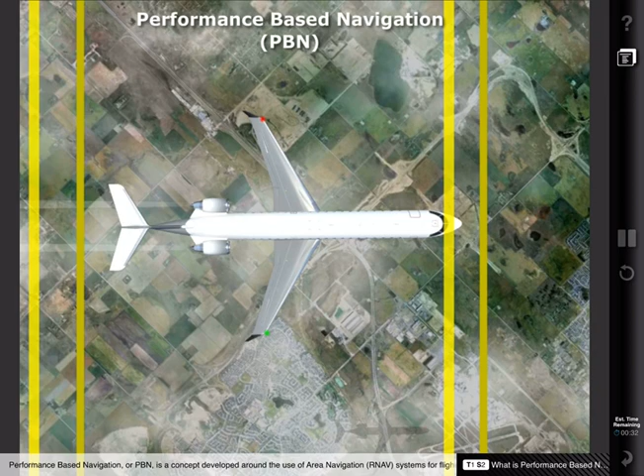Performance-based navigation, or PBN, is a concept developed around the use of area navigation, or RNAV, systems for flight operations. It recognizes and utilizes emerging technologies and improved aircraft navigation capabilities.

PBN provides a modern basis for airspace and obstacle clearance design, replacing conventional sensor-based navigation. This includes updated design for oceanic remote, en route, terminal, and approach phases of flight.

Conventional sensor-based navigation relies on aircraft reception of signals from ground-based radio navigation aids, such as NDB, VOR, localizer, or DME. In sensor-based navigation, the ground-based signals are used directly to navigate to and from navigation aids.

Sensor-based navigation has several drawbacks, including that airspace and obstacle clearance design criteria are variable and depend on the characteristics of each ground-based nav aid type.

Navigation system error increases as the aircraft increases its distance from the nav aid. And routes and approach tracks are restricted to straight-line designs and are constrained by large obstacle clearance allowances and the physical siting of the navigation aid or aids.

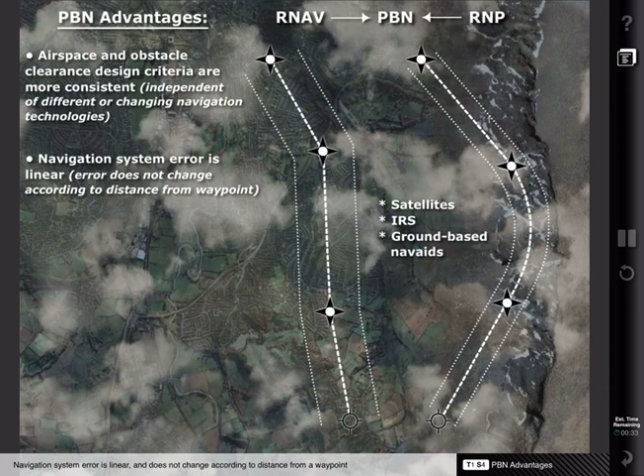Navigation system error is linear and does not change according to distance from a waypoint. Routes and approach tracks can include turning designs and are less constrained by obstacles due to smaller clearance allowances.

Navigation route design no longer needs to consider nav aid siting issues. And finally, the navigation function is performed by highly accurate and sophisticated onboard equipment, allowing a reduction in cockpit workload and an increase in safety.

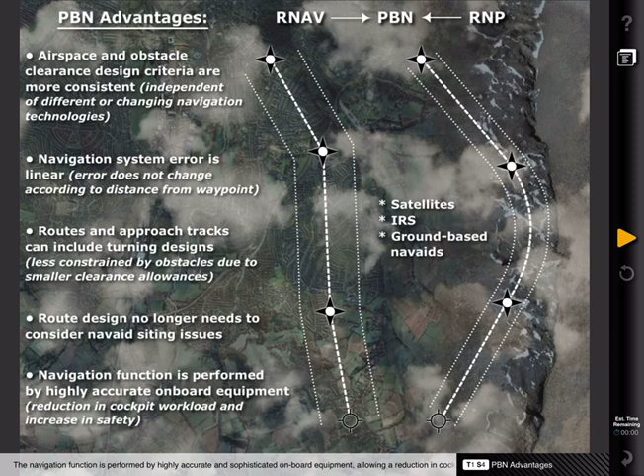The PBN concept relies on the use of an RNAV system. Two core inputs are required for the application of PBN: the NavAid infrastructure and the navigation specification. Applying these components in the context of routes and instrument procedures results in a third component: the navigation application. This topic will discuss the role of each of these components in the concept of PBN.

The concept of NavAid infrastructure refers to ground or space-based navigation aids. Ground-based navigation aids include NDB, VOR, and DME. Space-based nav aids include GNSS elements. As mentioned previously, PBN uses the two types of nav aids together for position fixing and navigation.

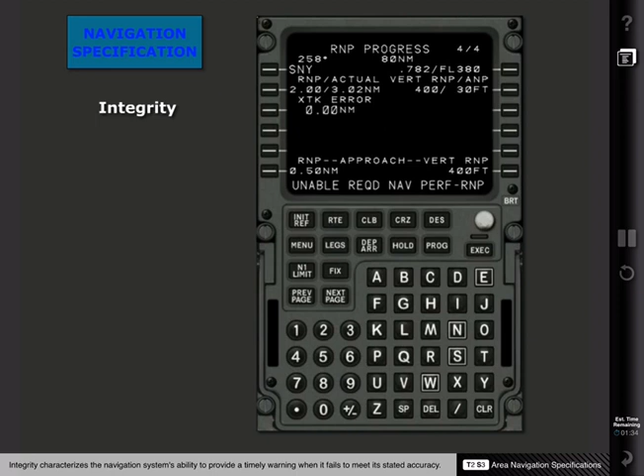Additionally, the RNAV system must have a level of integrity required by the given navigation specification in which the aircraft is operating. Integrity characterizes the navigation system's ability to provide a timely warning when it fails to meet its stated accuracy.

The safety of the operation is also contingent upon the accuracy, resolution, and integrity of the data being used. The processes applied during data origination will ensure the accuracy of the data.

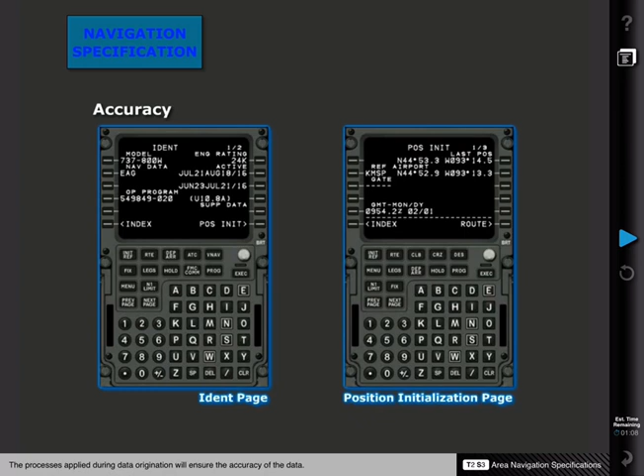A navigation specification that includes a requirement for onboard navigation performance monitoring and alerting is referred to as an RNP, or Required Navigation Performance Specification. A navigation specification that does not include a requirement for onboard navigation performance monitoring and alerting is referred to as an RNAV, or Area Navigation Specification.

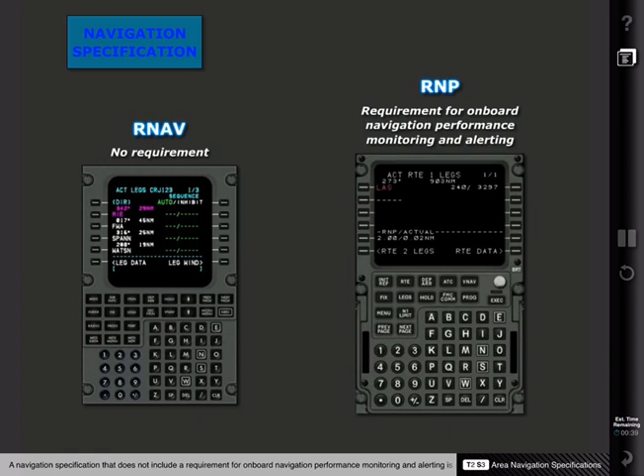For any particular PBN operation, it is possible that a sequence of RNAV and RNP applications is used. Be aware that compliance with one specification does not automatically imply compliance with another. More importantly, being compliant with a more stringent specification does not automatically imply compliance with a less stringent specification. Each RNAV and RNP specification will be discussed in detail later in the lesson.

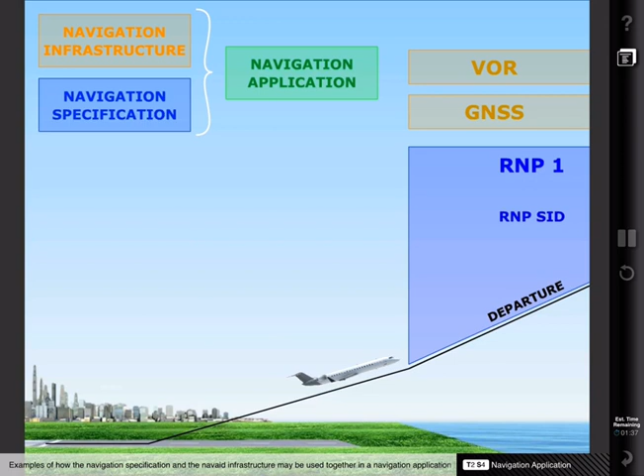The navigation application refers to utilizing the appropriate infrastructure and the specification required for the operation. Examples of how the navigation specification and the NavAid infrastructure may be used together in a navigation application include RNAV or RNP SIDs and STARs, RNAV or RNP ATS routes, and RNP approach procedures.

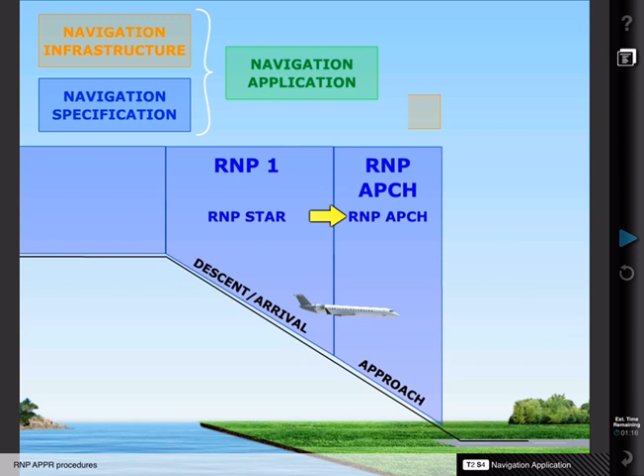RNAV systems range from single sensor-based systems to systems with multiple types of navigation sensors. The RNAV system typically integrates information from sensors such as air data, inertial reference, radio navigation, and satellite navigation, together with inputs from internal databases as well as crew-entered information.

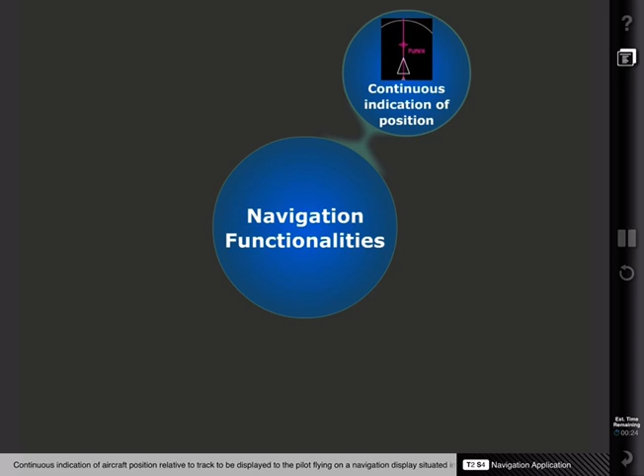Both RNAV and RNP specifications include requirements for certain navigation functionalities. At a basic level, these functionalities include continuous indication of aircraft position relative to track, displayed to the pilot flying on a navigation display situated in his or her primary field of view, display of distance and bearing to the active waypoint, display of ground speed or time to the active waypoint, navigation data storage function, and appropriate failure indication of the RNAV system, including the sensors.

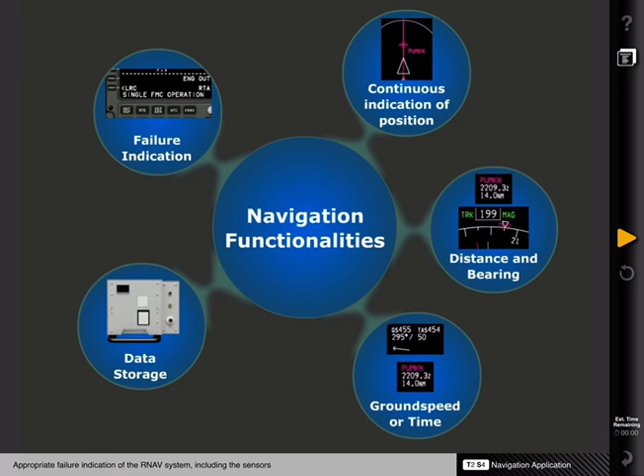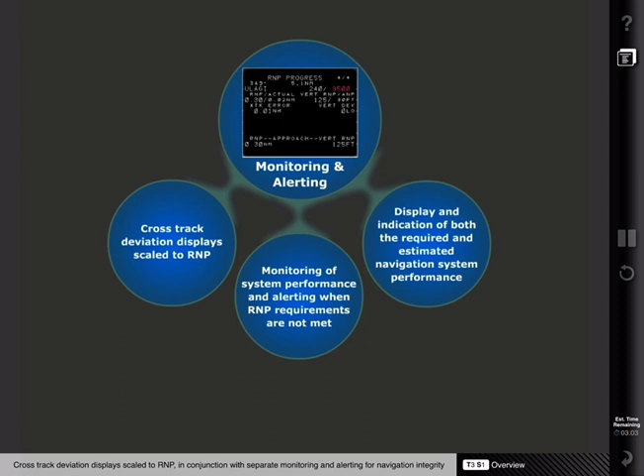An RNP system is an RNAV system whose functionalities support onboard performance monitoring and alerting. The performance monitoring and alerting capabilities may be provided in different forms depending on the system being used, including display and indication of both the required and estimated navigation system performance, monitoring of the system performance and alerting of the crew when RNP requirements are not met, and cross-track deviation displays scaled to RNP in conjunction with separate monitoring and alerting for navigation integrity.

The airworthiness approval process assures that each item of the required area navigation equipment installed is of a type and design appropriate to the operation. Additionally, operators need to ensure the required installations will function properly under foreseeable operating conditions.

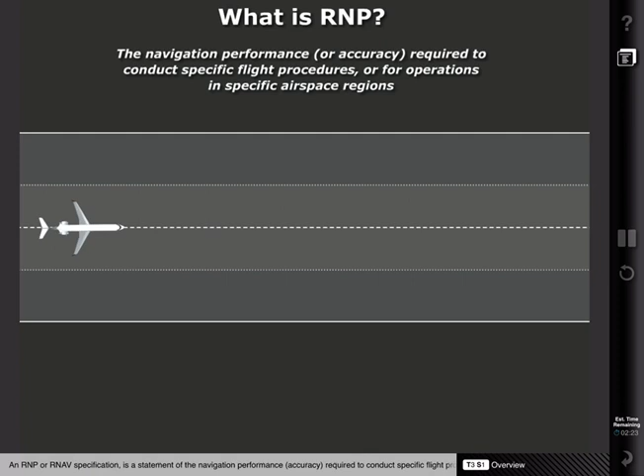An RNP or RNAV specification is a statement of the navigation performance or accuracy required to conduct specific flight procedures or for operations in specific airspace regions. In oceanic remote, en route, and terminal phases of flight, PBN is limited to operations with lateral performance requirements and time constraints. During the approach phase of flight, PBN accommodates both lateral and vertical operations.

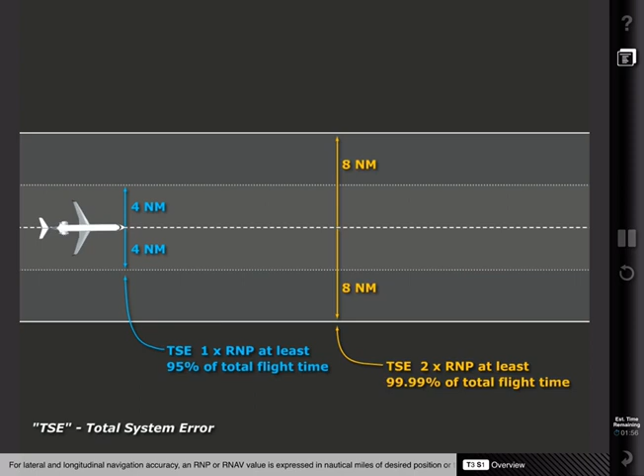For lateral and longitudinal navigation accuracy, an RNP or RNAV value is expressed in nautical miles of desired position or track. Actual navigation performance, or ANP, is a measure by the FMC of its position accuracy.

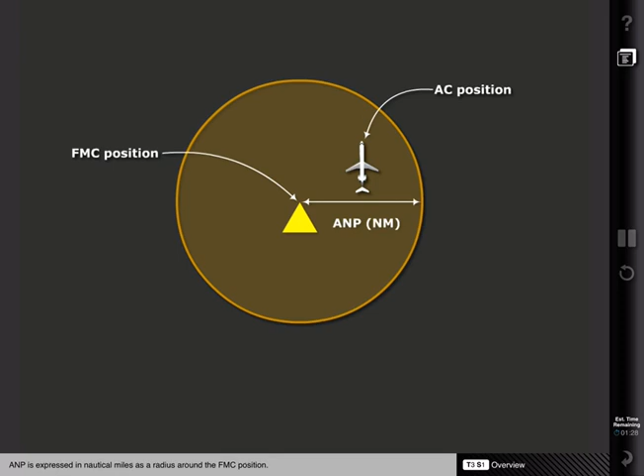ANP is expressed in nautical miles as a radius around the FMC position. The FMC estimates that there is a 95% certainty of the aircraft's actual position being within the ANP distance of the FMC position. A smaller ANP indicates a more accurate aircraft position relative to FMC position. A larger ANP indicates a possibly less accurate aircraft position relative to FMC position.

ANP is normally a low value, but may increase if degradation of satellite or ground-based signals occurs, or if equipment failures occur on board.

The area navigation system must be sufficiently accurate to ensure that the ANP is maintained within the RNP or RNAV distance of the desired route or procedure 95% of the time.

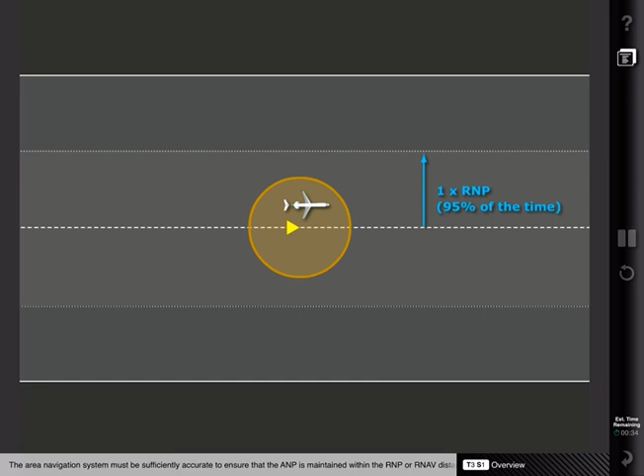To account for the small percentage of time when the aircraft position may be outside the RNP distance, a containment limit distance of 2 times the RNP value is expressed for airspace separation and obstacle clearance.

The RNAV system must be sufficiently accurate to ensure that the aircraft's actual position is maintained within the containment limit distance of the FMC calculated position 99.999% of the time.

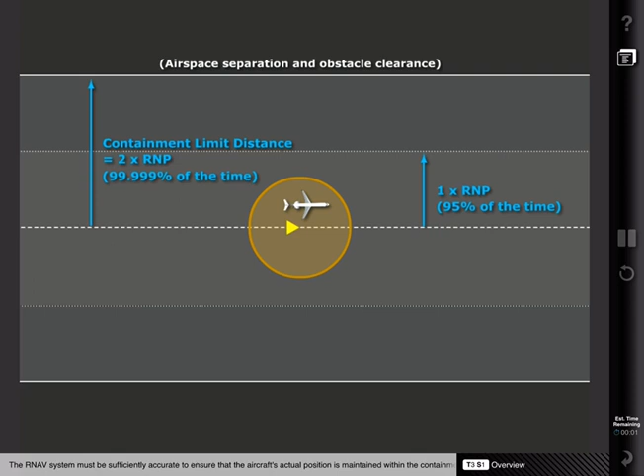The inability to achieve the required lateral navigation accuracy may be due to navigation errors related to aircraft tracking and positioning. The three main errors in the context of onboard performance monitoring and alerting are Path Definition Error, or PDE, Flight Technical Error, or FTE, and Navigation System Error, or NSE.

PDE is the difference between the defined path and the desired path. In most cases, PDE is considered negligible, since the named routes and procedures retrieved from the navigation database are consistent, repeatable paths.

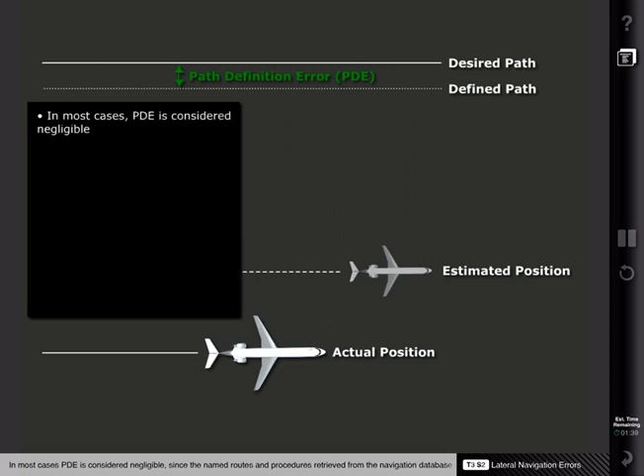A consistent, repeatable path cannot be defined for a turn that allows for a flyby turn at a waypoint, a flyover waypoint, or occurs when the aircraft reaches a target altitude. For these, a variability of route will be expected. Onboard performance monitoring and alerting of PDE are managed by gross reasonableness checks of navigation data.

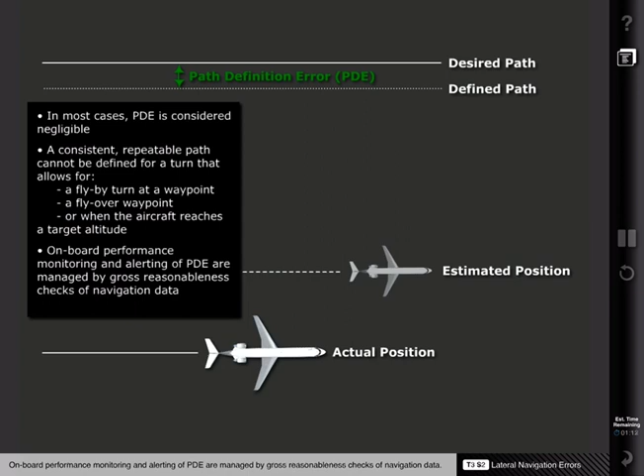FTE refers to the pilot or autopilot's ability to follow the defined path or track. FTE can be monitored by the autopilot or with crew procedures, for example, with a moving map display.

NSE is defined as the difference between the aircraft's estimated position and actual position.

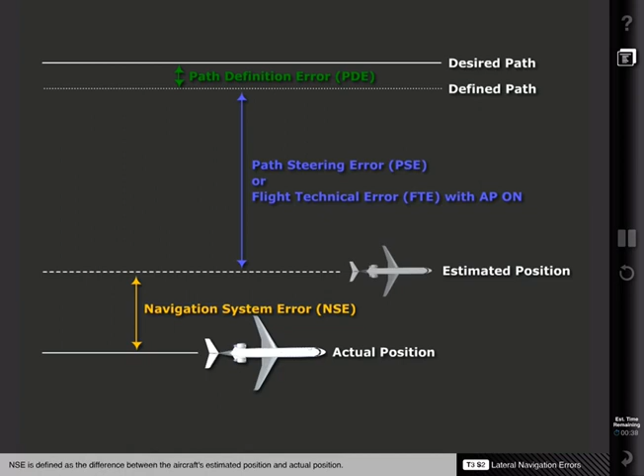Total system error, or TSE, is the total of the errors combined mathematically, not simply added together. The TSE must remain equal to or less than the required accuracy for 95% of the total flight time.

Abnormal and contingency procedures are to be used in case of loss of the PBN capability. These procedures will depend on the RNAV system installed and the specification of operation.

PBN is based on the ability to assure reliable, repeatable, and predictable flight paths for improved capacity and efficiency. This requires not only the functions traditionally provided by the RNAV system, but may also require specific functions to improve procedures and airspace and air traffic operations.

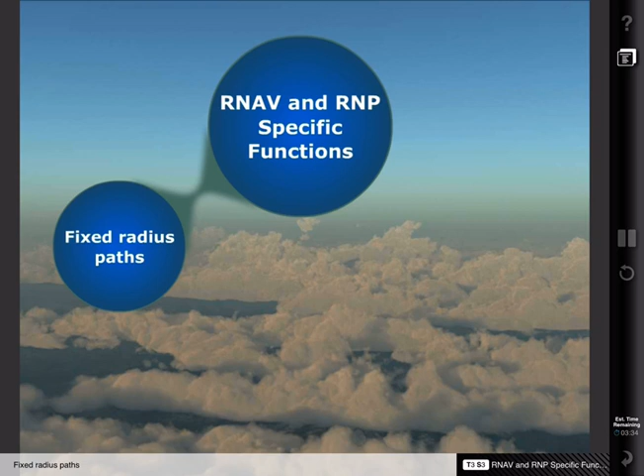Some of the specific capabilities we will discuss include fixed radius paths, RNAV or RNP holding, and lateral offsets.

The fixed radius path, or FRP, can be one of two types: radius to fix, or RF leg type, or fixed radius turn, or FRT. The RF leg should be used when there is a requirement for a specific curved path radius in a terminal or approach procedure. The RF leg is defined by a radius, arc length, and fix. RNP systems supporting this type of turn provide the same ability to conform to the track-keeping accuracy in the turn as in the straight line.

The FRT is intended to be used with en route procedures. Due to how the procedure data is defined, the RNP system creates the fixed radius turn. There are two possible radii associated with this type of turn: 22.5 nautical miles for high altitudes above flight level 195, and 15 nautical miles for low altitudes. This enables improvement in airspace usage through closely spaced parallel routes.

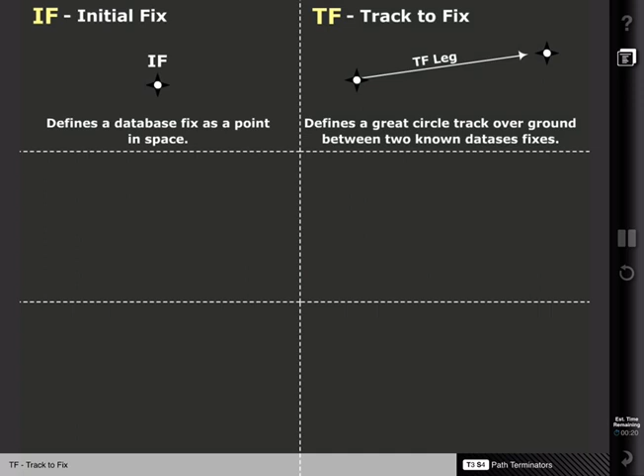Path terminators are a set of specific codes that define a type of termination from a path. Path terminators are assigned to all SIDs, STARs, and approach procedures and include, but aren't limited to, IF, or initial fix, TF, or track to fix, CF, course to fix, DF, direct to fix, FA, fix to an altitude, and CA, course to an altitude.

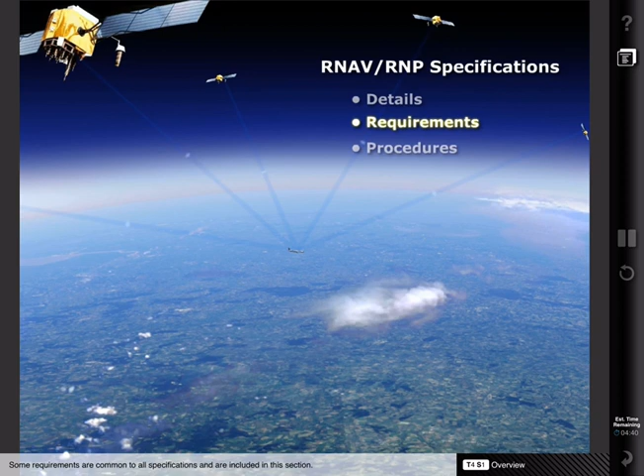We will now discuss the details, requirements, and procedures for each RNAV and RNP specification. Some requirements are common to all specifications and are included in this section. Commercial operators must have a training program addressing operational practices, normal and contingency procedures, and specific items related to the specification.

In order for operators to get approval for RNAV/RNP operations, they must prove their aircraft are properly equipped with the appropriate navigation system. Additionally, some specifications define the instrument display requirements, such as being visible to the pilot in their primary field of view and the navigation map having lateral deviation functionality.

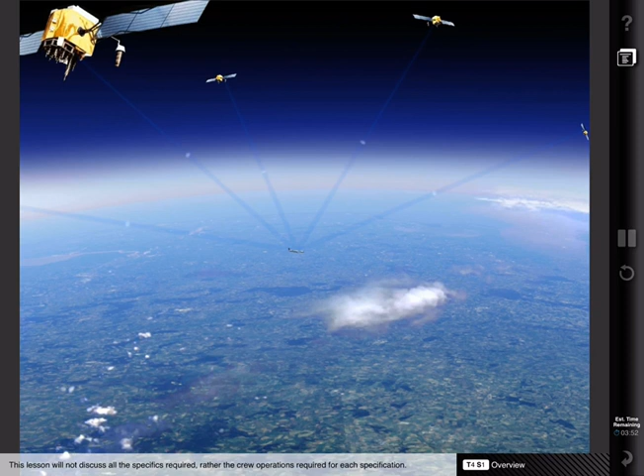This lesson will not discuss all the specifics required, rather the crew operations required for each specification.

Operators and pilots intending to conduct operations in RNAV or RNP airspace need to use the appropriate ICAO flight plan designation. For RNAV, this means filing with the appropriate flight plan suffix indicating approval for operation on the route. For RNP operation, the letter R should be placed in Block 10 of the ICAO flight plan to indicate the pilot has reviewed the planned route of flight and determined the RNP requirements and the aircraft and operator approval. The accuracy capability should be placed in the remarks section.

Pilots must review aircraft maintenance logs to ensure proper operation of equipment required for the RNAV or RNP accuracy. If an MEL is utilized, ensure the inoperative equipment allows for RNAV or RNP dispatch.

Additionally, pilots need to ensure onboard navigation data is current and includes the appropriate procedures required of the operation. The database must be valid for the current Aeronautical Information Regulation and Control Cycle, unless otherwise specified in Operations Documents or AMC.

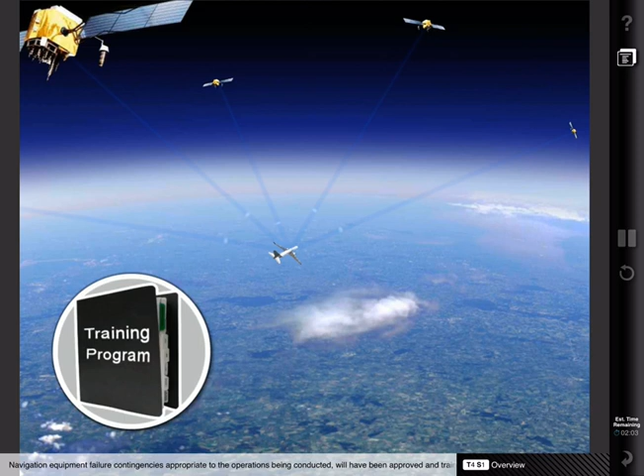For any operation utilizing GNSS, operators are required to ensure appropriate RAIM is available for the operation. Navigation equipment failure contingencies appropriate to the operations being conducted will have been approved and trained in the pilot's training program. Should any failure occur, the pilot should revert to this training as appropriate.

Additionally, the pilot must notify ATC of any loss of RNP RNAV capability and their intentions.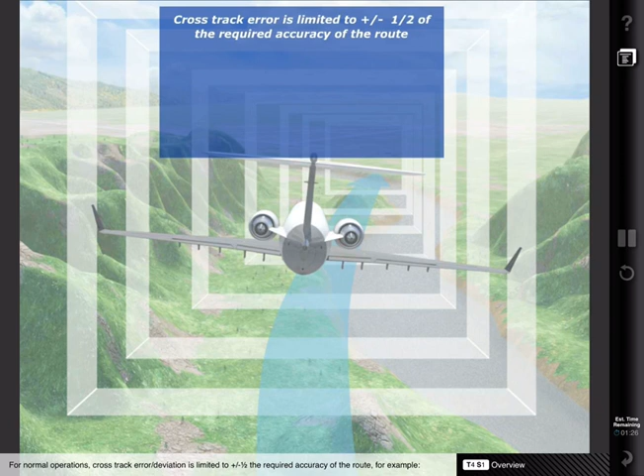All pilots are expected to maintain route centerlines during all RNAV operations, unless authorized by ATC or in an emergency. For normal operations, cross-track error deviation is limited to plus or minus half the required accuracy of the route.

For example, 0.5 nautical mile for RNAV1, 0.5 nautical mile for RNP1, 1 nautical mile for RNAV2, 2 nautical miles for RNP4. Brief deviations from this are allowable during and immediately after procedure or route turns. The deviation must not exceed 1 times the navigation accuracy, 1.0 nautical miles for RNAV1, 2.0 nautical miles for RNAV2, and so on.

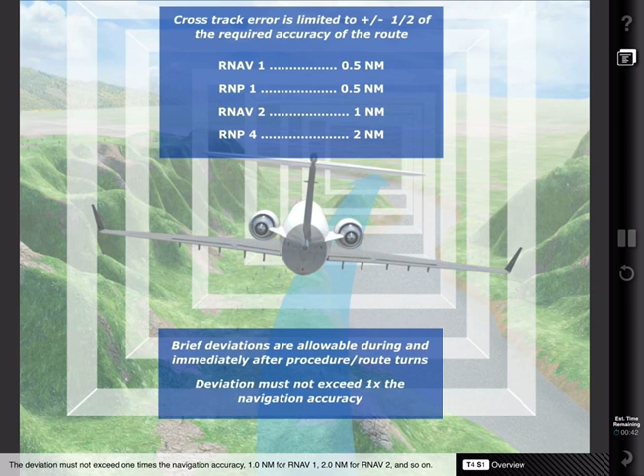RNP values may be changed automatically by the FMC to certain default values, or may be set manually by the crew when required by procedures. Typical RNP settings for flight operations are: Oceanic airspace, RNP 10 or 4. Continental en route, RNP 2. Terminal airspace, RNP 1. Approach and departure, RNP 1. RNP approaches, RNP .1 to .3.

RNAV-10 has been designated for operations in oceanic and remote areas. Though the designation of the airworthiness and operational approval, as well as airspace and route designation, is RNP-10, it will be referred to as RNAV-10. This is to keep consistency with the differentiation of RNP requiring monitoring and alerting, and RNAV not having this requirement.

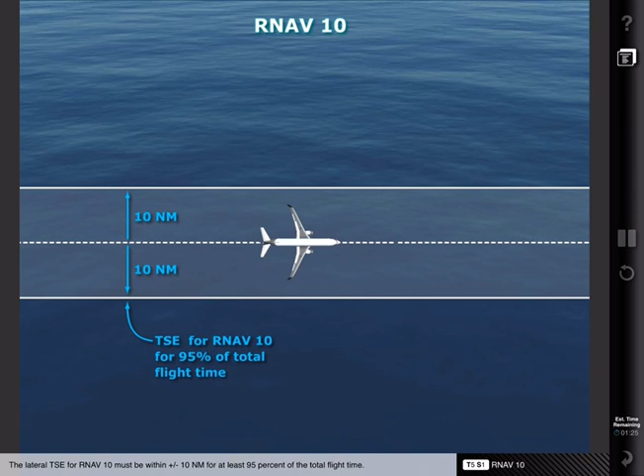The lateral TSE for RNAV-10 must be within plus or minus 10 nautical miles for at least 95% of the total flight time. The along track error must also be within plus or minus 10 nautical miles for at least 95% of the total flight time. Additionally, RNAV-10 supports 50 nautical mile lateral and 50 nautical mile longitudinal distance-based separation minima.

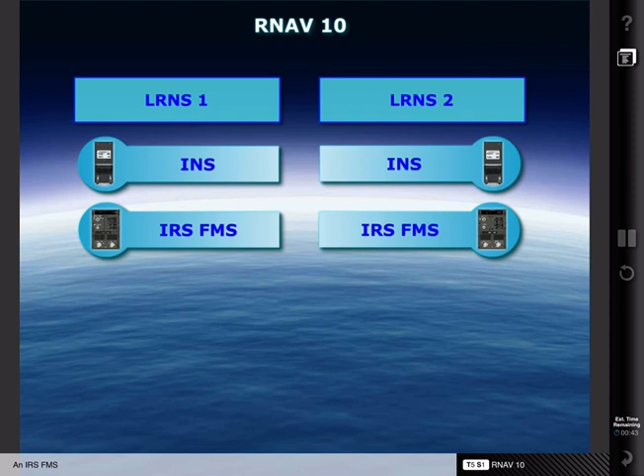RNAV-10 requires that the aircraft operating in oceanic and remote areas be equipped with at least 2 independent and serviceable long-range navigation systems, or LRNSs, comprising an INS, an IRS-FMS, or a GNSS.

For aircraft utilizing dual INS or dual IRU systems, RNAV-10 operations have a time limit of 6.2 hours of flight time. The timing starts when the systems are placed in navigation mode or at the last point at which the systems are updated.

Aircraft equipped with a single INS or IRU and GNSS do not have these time limitations.

Prior to entering oceanic airspace, the position of the aircraft must be checked as accurately as possible by using external nav aids. This may require DME and/or VOR checks to determine navigation system errors through displayed and actual positions.

Cross-checking procedures must be used in flight to identify navigation errors in sufficient time to prevent aircraft deviation from cleared routes. Any deterioration or failure of the navigation equipment below that required, or deviation due to a contingency procedure, must be reported to ATC.

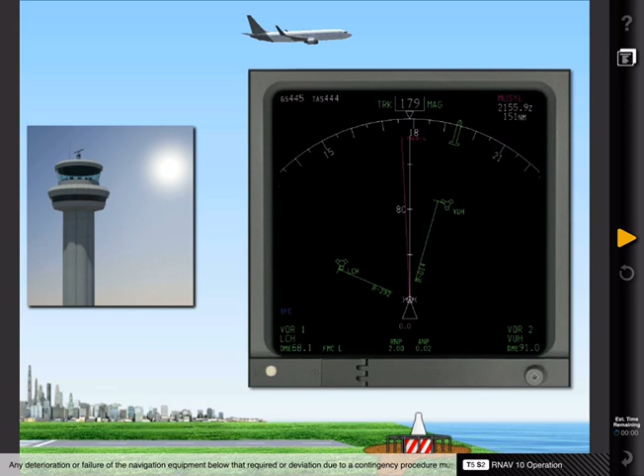RNAV 5 operations are typically conducted en route and on arrivals. During operations in RNAV 5 airspace or routes, the lateral TSE must be within 5 nautical miles for at least 95% of the total flight time.

RNAV 5 operations are based on the use of RNAV equipment that utilize inputs from one or more of the following to determine the aircraft position along with a means to establish and follow the desired path: VOR DME, DME, INS or IRS, and GNSS.

RNAV 5 requires no regulation to carry a navigation database, and therefore is subject to the limitations associated with manual insertion of waypoint coordinates. Additionally, since the specification does not require the aircraft to be installed with dual RNAV systems, an alternate navigation source must be operable in the event of loss of RNAV capability.

Generally, RNAV 2 is used en route, while RNAV 1 is used for terminal phases of flight, including arrivals and departures. During RNAV 1 operations, the lateral TSE must be within plus or minus 1 nautical mile for at least 95% of the total flight time.

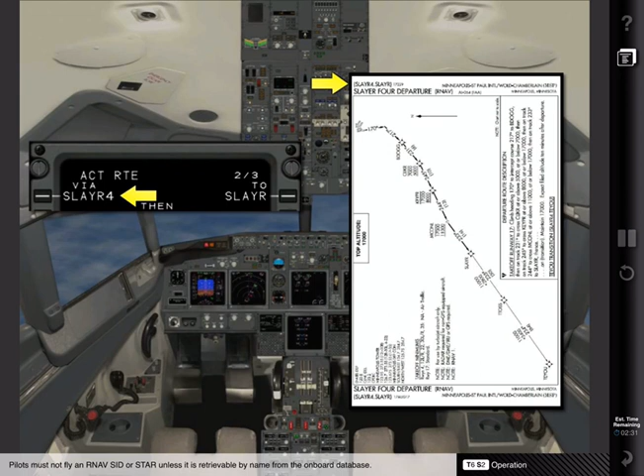Pilots must not fly an RNAV SID or STAR unless it is retrievable by name from the onboard database. The pilot should confirm the routing conforms to that of the charted route. Once loaded by name, the SID or STAR may be subsequently modified by the entry or deletion of specific waypoints in response to ATC clearances. The manual entry or creation of new waypoints by latitude and longitude values is not permitted.

Additionally, pilots may not change any RNAV SID or STAR database waypoint from a flyover to a flyby and vice versa.

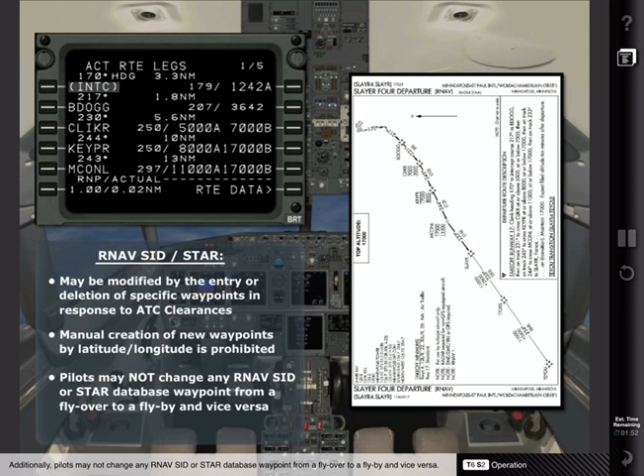Although not recommended, routes can be built using named fixes waypoints from the database, as long as all fixes along the published route to be flown are inserted. The route may be subsequently modified by the insertion and deletion of named waypoints in response to ATC clearances. As with SIDs and STARs, the creation of waypoints by manual entry of latitude and longitude values is prohibited.

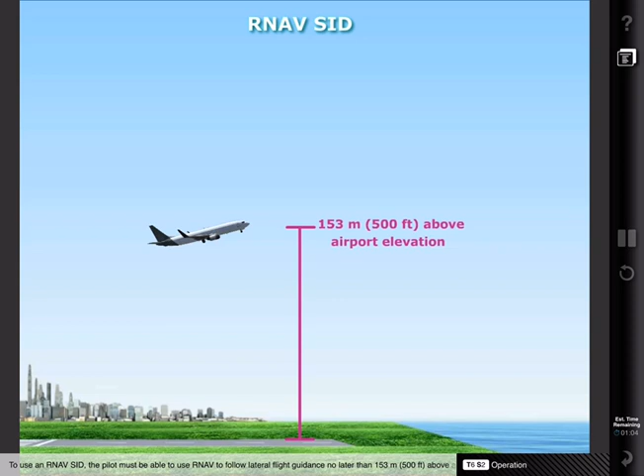To use an RNAV SID, the pilot must be able to use RNAV to follow lateral flight guidance no later than 153 meters or 500 feet above airport elevation, though published RNAV guidance on a given route may begin higher.

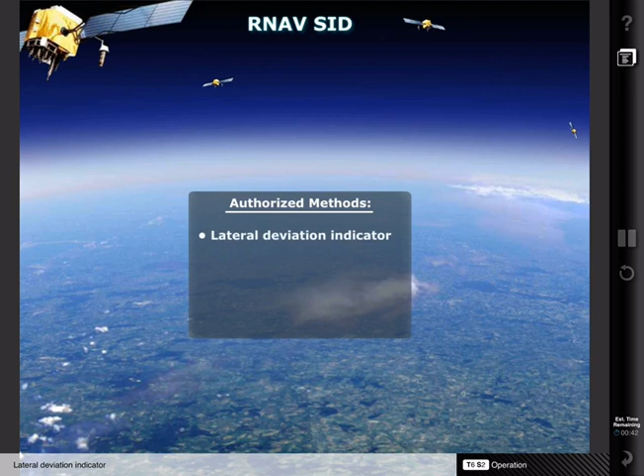For aircraft using GNSS, the signal must be acquired before the takeoff roll commences. Pilots must use an authorized method to achieve an appropriate level of performance for RNAV-1, which includes lateral deviation indicator, navigation map display, flight director, and/or autopilot.

Route modifications in the terminal area may take the form of radar headings and direct-to clearances, which must be complied with. Insertion of waypoints loaded by name from the database may be required and is acceptable. To reiterate, manual entry or modification of the route using waypoints not in the database is not permitted.

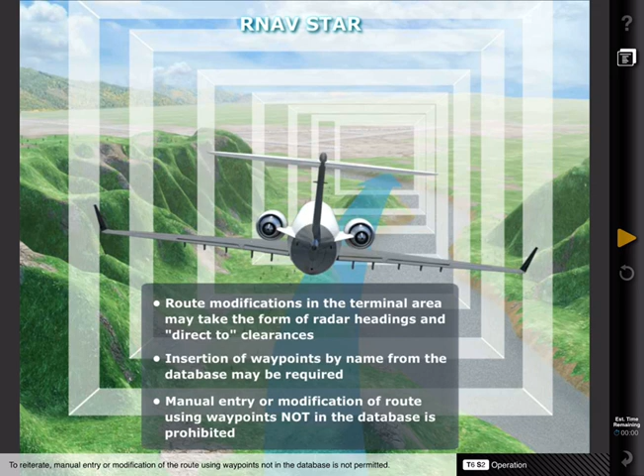We will now discuss RNP specification details. RNP-4 is designed for operations in oceanic and remote airspace, therefore has no requirement for ground-based nav aids.

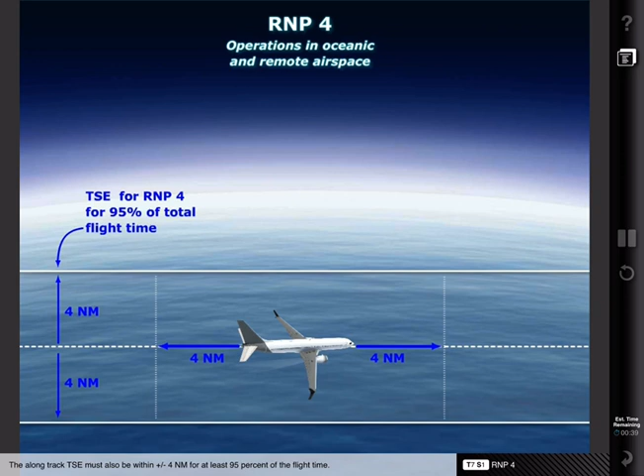During RNP-4 operations, the lateral TSE must be within plus or minus 4 nautical miles for at least 95% of the flight time. The along-track TSE must also be within plus or minus 4 nautical miles for at least 95% of the flight time. The flight technical error should not exceed 2.0 nautical miles to satisfy the 95% accuracy requirement.

GNSS is the primary means of navigation for RNP-4, either as a standalone navigation system or as part of a multi-sensor system. For RNP-4 oceanic or remote airspace operations, at least 2 serviceable independent LRNSs must be installed and operable.

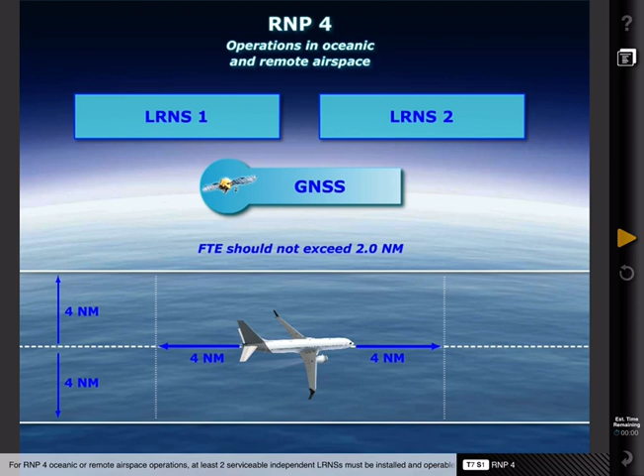Much like RNP-4, RNP-2 is used in the en route and oceanic or remote phases of flight. Also like RNP-4, GNSS is the primary means of navigation for RNP-2, either as a standalone navigation system or as part of a multi-sensor system.

For RNP-2 oceanic or remote airspace operations, at least 2 serviceable independent LRNSs must be installed and operable.

During operations in airspace or on routes designated as RNP-2, the lateral TSE must be within plus or minus 2 nautical miles for at least 95% of the total flight time. The along-track error must also be within plus or minus 2 nautical miles for at least 95% of the total flight time. To satisfy the 95% accuracy requirement, the flight technical error should not exceed 1 nautical mile.

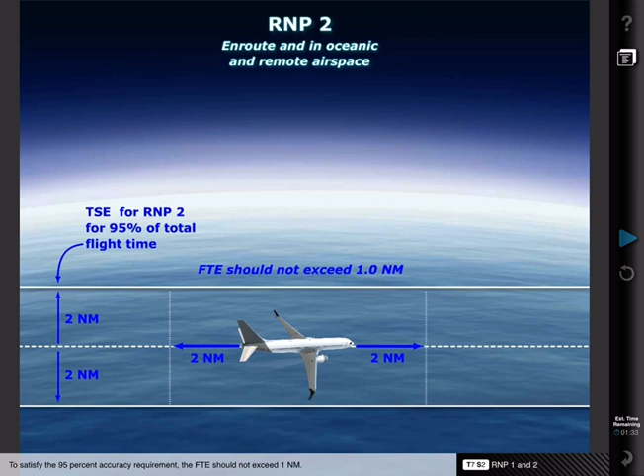RNP-1 is designed for arrival and departure procedures and is very similar to RNAV-1. The main difference is the requirement in RNP-1 for onboard performance monitoring and alerting. Additionally, RNP-1 primarily utilizes GNSS and may include RF legs.

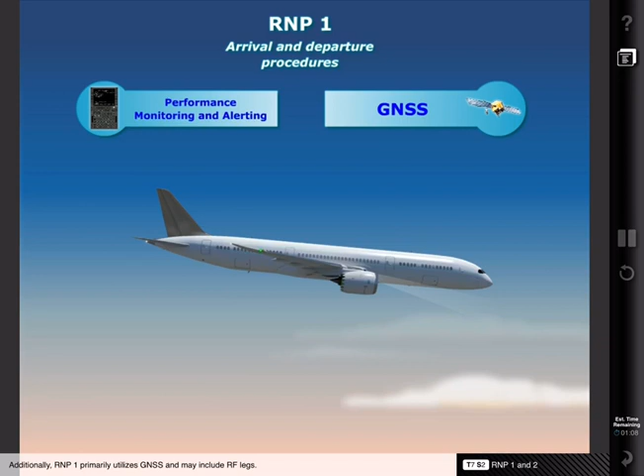Pilots must not fly an RNP SID or STAR unless it is retrievable by name from the onboard database. Once loaded by name, the SID or STAR may be subsequently modified by the entry or deletion of specific waypoints in response to ATC clearances. The manual entry or creation of new waypoints by latitude and longitude values is prohibited.

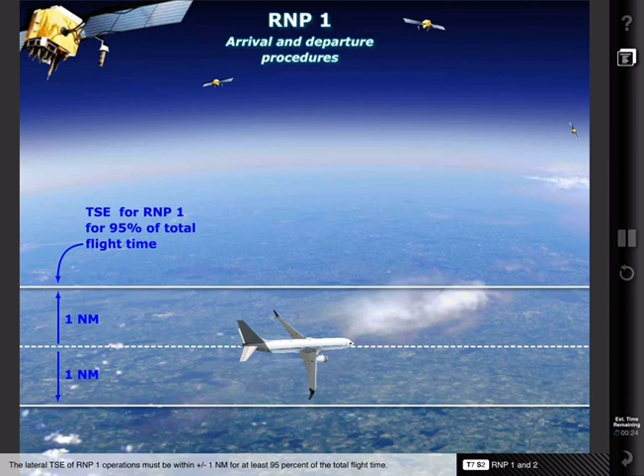The lateral TSE of RNP-1 operations must be within plus or minus 1 nautical mile for at least 95% of the total flight time. Additionally, the along-track error must be within plus or minus 1 nautical mile for at least 95% of the time. To satisfy the accuracy requirement, the FTE should not exceed 0.5 nautical mile for autopilot or flight director, or 0.8 nautical mile for manual control.

RNP 0.3 is used in all phases of flight except oceanic, remote, and final approach. The lateral TSE of RNP 0.3 operations must be within plus or minus 0.3 nautical mile for at least 95% of the total flight time. Additionally, the along-track error must be within plus or minus 0.3 nautical mile for at least 95% of the time. This specification is for use by helicopters.

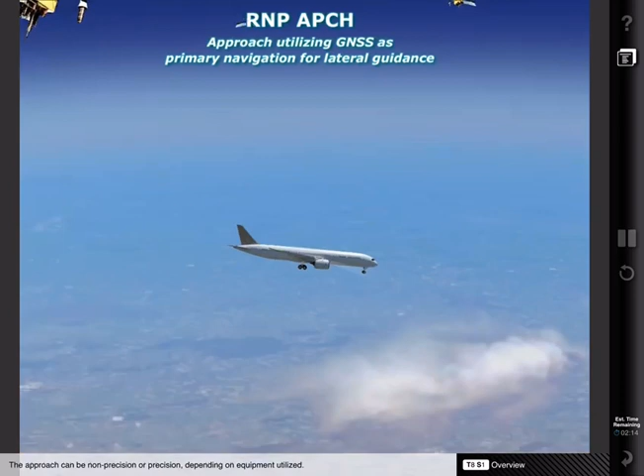The RNP approach allows the pilot to fly an approach utilizing GNSS as the primary navigation system for lateral guidance. The approach can be non-precision or precision depending on equipment utilized. In flying the approach without vertical guidance, it is flown to an LNAV MDA as stated on the published instrument approach procedure.

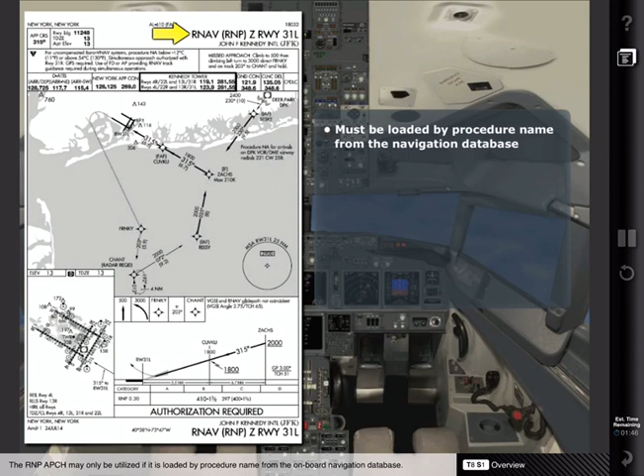The RNP approach may only be utilized if it is loaded by procedure name from the onboard navigation database. The pilots must ensure the route conforms to the charted procedure prior to the initial approach fix. The missed approach segment may be based on conventional nav aids, VOR, DME, etc., or GNSS-based. During pre-flight, the pilot should ensure sufficient means are available to land at the destination or alternate should there be a loss of RNP approach airborne capability.

In flying the RNP approach, during operations on the initial and intermediate segments and for an RNAV missed approach, the lateral TSE must be within plus or minus 1 nautical mile for at least 95% of the total flight time. Additionally, the along-track error must also be within plus or minus 1 nautical mile for at least 95% of the total flight time.

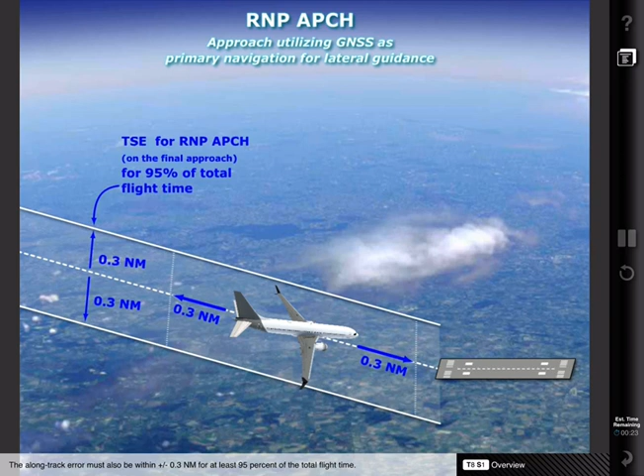During operations on the final approach segment, the lateral TSE must be within plus or minus 0.3 nautical mile for at least 95% of the total flight time. The along-track error must also be within plus or minus 0.3 nautical mile for at least 95% of the total flight time. The 95% FTE should not exceed 0.5 nautical mile on the initial and intermediate segments and an RNAV missed approach. The 95% FTE should not exceed 0.25 nautical mile on the final approach segment.

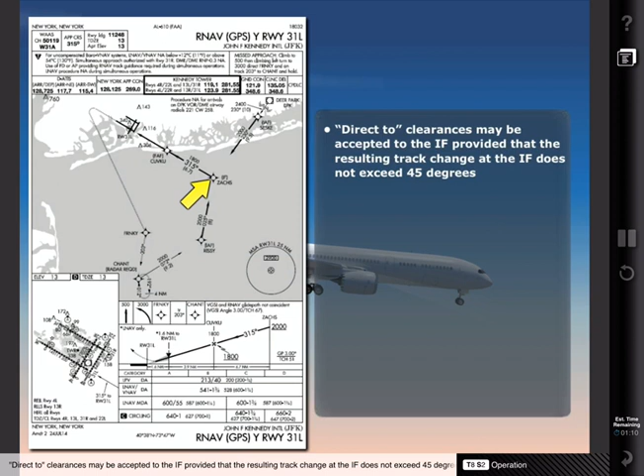Manual entry of coordinates into the RNAV system by the crew for operation within the terminal area is prohibited. Direct to clearances may be accepted to the IF, provided that the resulting track change at the IF does not exceed 45 degrees. A direct to clearance to the FAF is not acceptable.

The lateral definition of the flight path between the FAF and the missed approach point must not be revised by the crew under any circumstances. The aircraft must be established on the final approach course no later than the FAF before starting the descent.

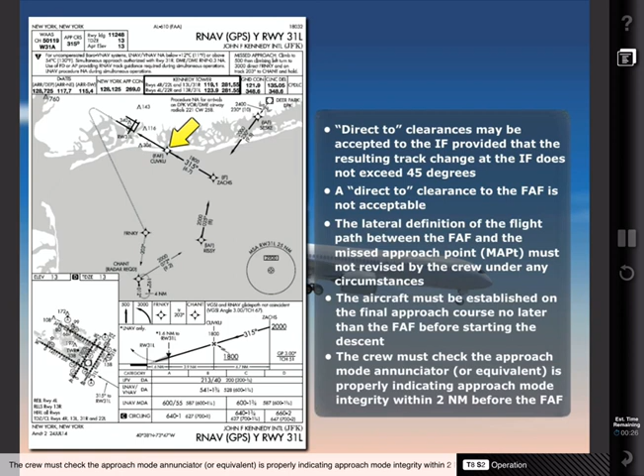The crew must check the approach mode annunciator or equivalent is properly indicating approach mode integrity within 2 nautical miles before the FAF, unless the system clearly indicates to the crew that the approach mode is activated. The procedure must be discontinued if the navigation display is flagged invalid, in case of loss of integrity alerting function, if integrity alerting function is annunciated not available prior to passing the FAF, or if FTE is excessive.

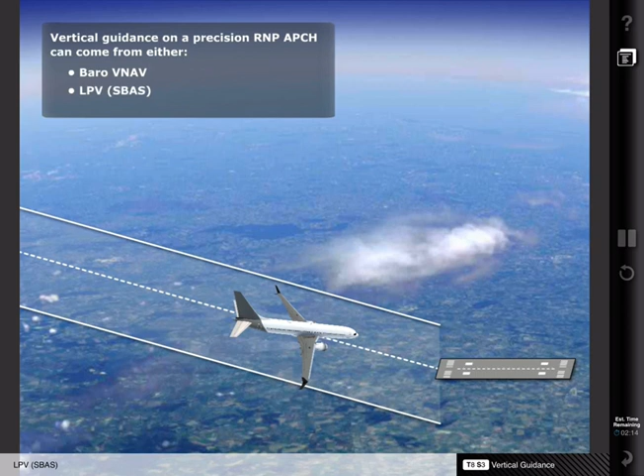Vertical guidance on a precision RNP approach can come from either barometric or baro VNAV, or localizer performance with vertical guidance, LPV, which is a satellite-based augmentation system. A baro VNAV type of approach uses GNSS aided by the barometric system. The vertical guidance supplied by the baro VNAV system must be certified for this purpose.

This 3D approach requires the current altimeter setting of the landing airport. Remote altimeter settings are prohibited. Additionally, flight crews should be familiar with the pronounced effect of non-standard temperature on baro VNAV operations. Temperature limitations published on RNP approach procedures need to be complied with, unless the avionics system has temperature compensation capabilities.

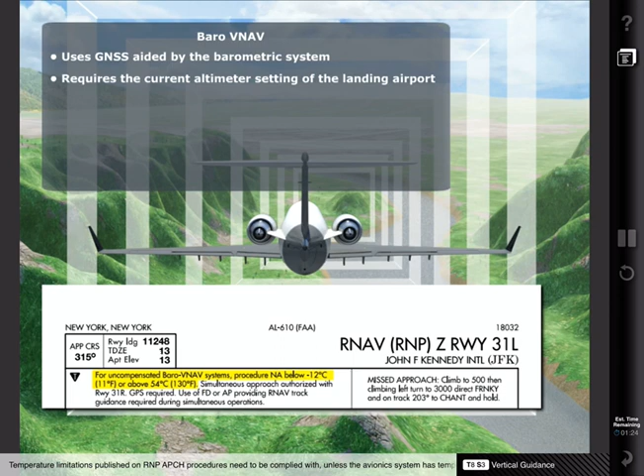When baro VNAV is used for guidance during the final approach segment, deviations above and below path must not exceed plus 30 meters and minus 15 meters, or plus 100 feet and minus 50 feet. Pilots must execute a missed approach if the lateral deviation exceeds 1 time the RNP, or the vertical deviation exceeds 22 meters or 75 feet, unless the pilot has the visual references required to continue the approach.

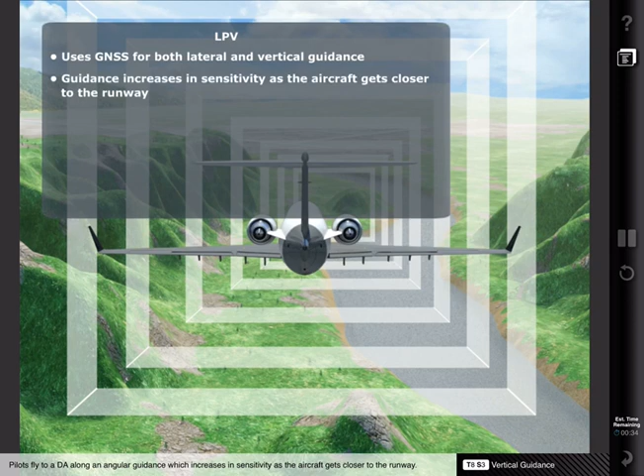LPV is a 3D operation utilizing the GNSS for both lateral and vertical guidance. Pilots fly to a decision altitude along an angular guidance, which increases in sensitivity as the aircraft gets closer to the runway. An RNP approach to LPV minima requires use of a final approach segment, or FAS, data block. The FAS data block contains the lateral and vertical parameters that define the final approach to be flown.

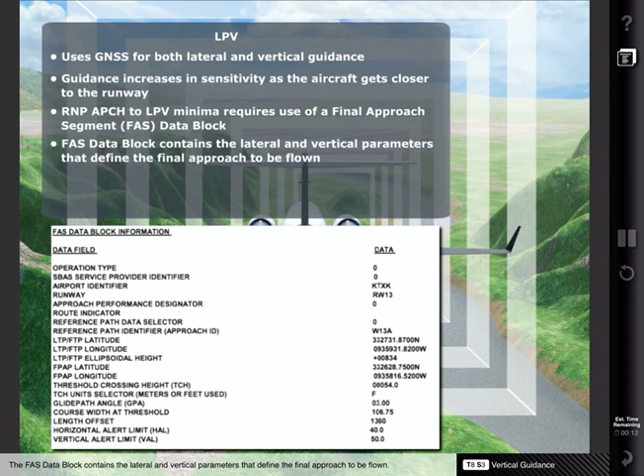The air traffic service provider submits all LPV-specific data required by a data house for the coding of the procedure in a navigation database.

RNP approaches that require authorization are labeled RNP-AR approaches. These types of approaches may only be conducted by flight crews meeting special training requirements in aircraft meeting specified performance and functional requirements. For RNP-AR approach procedures, curved routes between the FAP and the runway are possible.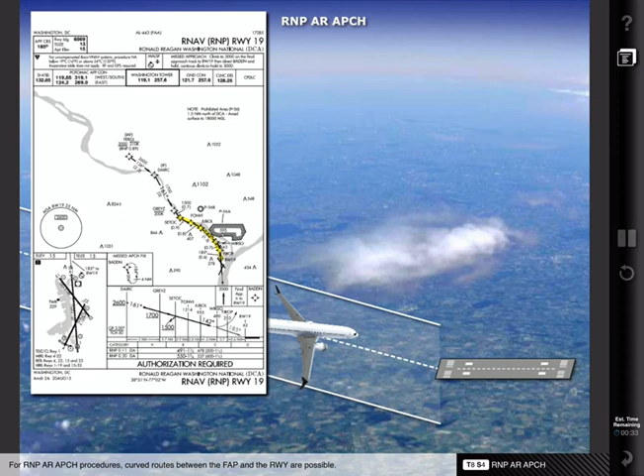All aircraft must have a cross-track navigation error no greater than the applicable accuracy value of 0.1 nautical mile to 0.3 nautical mile for 95% of the flight time. The along-track positioning error is also held to this standard. Missed approach RNP values can be less than 1. Minima DA/DH can be as low as 250 feet.

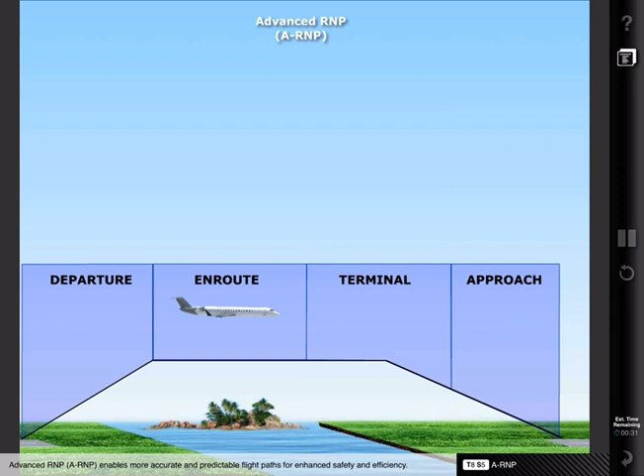Advanced RNP, or ARNP, enables more accurate and predictable flight paths for enhanced safety and efficiency. It is used to operate in the en route, terminal, approach, and departure phases of flight. ARNP incorporates the navigation specifications RNAV5, RNAV2, RNAV1, RNP2, RNP1, and RNP approach, and requires RNP capability.

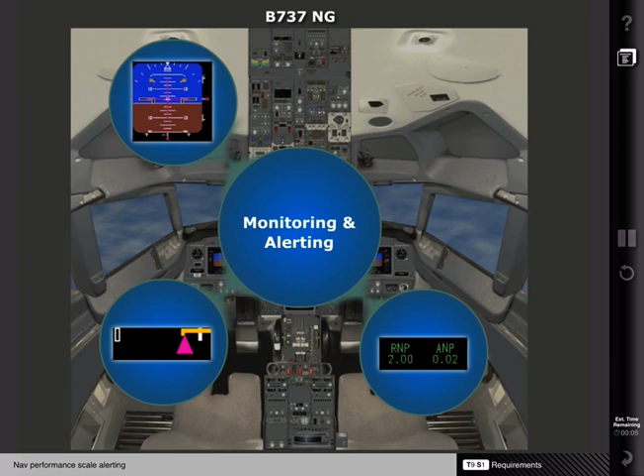ARNP may be associated with other functional elements. An RNP navigation specification requires onboard performance monitoring and alerting. This is accomplished on the B737NG by displays of RNP and ANP values to the flight crew, lateral and vertical navigation performance scales on the PFDs, nav performance scale alerting, and FMC alert messages.

Current lateral RNP and ANP values are displayed in numerical form on the FMC legs page. Current lateral and vertical RNP/ANP values are displayed in numerical form on the FMC progress page. Current lateral and vertical RNP/ANP values are displayed in numerical form on the nav display, or ND.

Lateral and vertical nav performance scales are located on each PFD to provide additional displays of RNP and ANP values. The symbology on both the lateral and vertical scales are identical. The hollow center white index represents the aircraft position. The solid white end scale symbols represent the current RNP value.

The ANP bars originate from the outer scale and expand inwards. The length of the ANP bars indicate the ANP value relative to the RNP scale. The magenta pointer symbol indicates the required lateral track or vertical path location relative to the aircraft position.

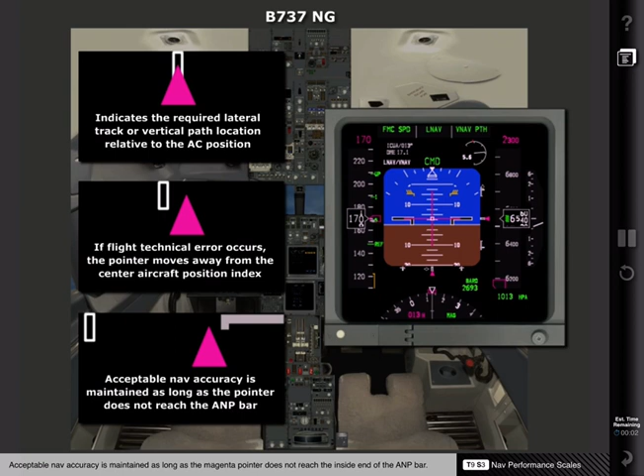If flight technical error is so large that the magenta triangle moves into the ANP bar, acceptable nav accuracy is no longer being maintained. After 10 seconds, the magenta pointer will flash and the ANP bars will turn amber. If the flight technical error exceeds the RNP value, the magenta pointer turns hollow and parks outside of the RNP end scale marks. If ANP increases due to degradation of nav input signals or onboard equipment failures, the ANP bars may merge in the center of the nav performance scale.

Merged ANP bars will also turn amber.

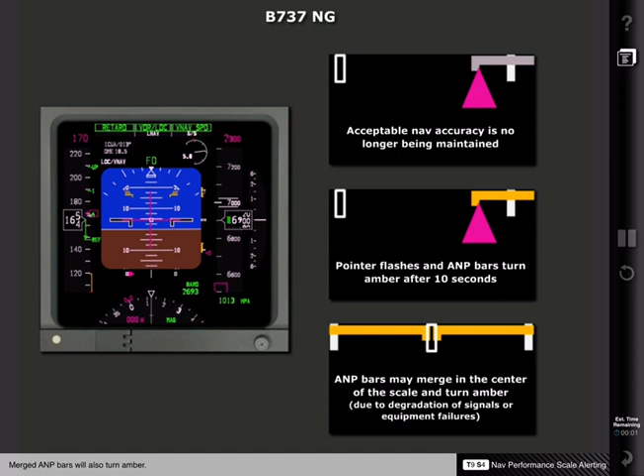The FMC provides various alerts to the flight crew for navigation performance monitoring. If ANP grows to the RNP value or greater, the FMC alerting message, Unable Nav Performance RNP, will appear in the CDU scratchpad. If a manually entered RNP value is greater than the FMC default RNP value, the alert message Verify RNP appears. When the navigation performance scales are enabled and the manually entered vertical RNP is greater than the default vertical RNP value, or the manually entered vertical RNP is less than the current vertical ANP value, the alert message Verify Vertical RNP Value appears.

Onboard performance and alerting in the Airbus is different from that in the Boeing aircraft. Displays on the A320 include required and estimated navigation performance, level of accuracy, lateral and vertical navigation performance scales on the PFDs, and FMC alert messages.

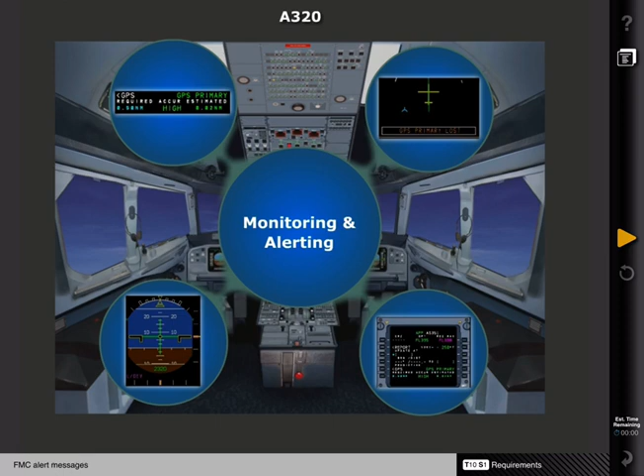Current lateral RNP is displayed in the required field of the progress page. The displayed RNP is, in decreasing order of priority, the flight crew manually entered value, the nav database procedure value, or the system's default value.

The display also shows the estimated position uncertainty, or EPU, what Boeing calls ANP. Accuracy is displayed between the two as high if the EPU does not exceed the RNP, or low if the EPU exceeds the RNP.

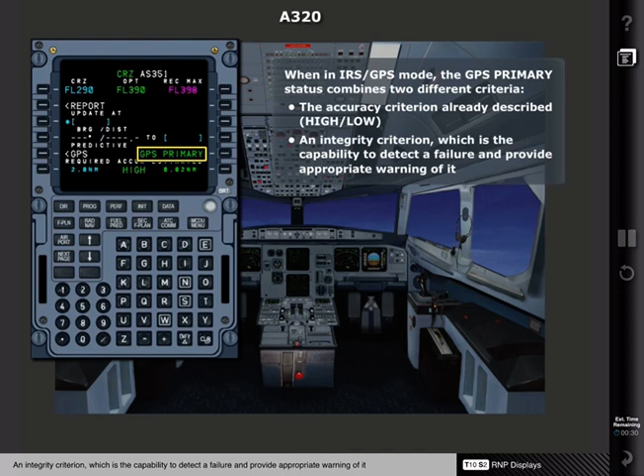When in IRS GPS mode, the GPS primary status combines two different criteria: the accuracy criterion already described, whether high or low, and an integrity criterion, which is the capability to detect a failure and provide appropriate warning of it. When both criteria are met, GPS primary displays in green on the progress page and temporarily on the ND. If both criteria are not met, the GPS primary is removed from the progress page and alerts are displayed. It is possible to clear the scratchpad message on the MCDU, but not on the ND.

When RNP is 0.3 nautical miles or less, a lateral deviation scale is presented on the PFD, and an improved cross-track error is presented on the ND. The deviation scale on the PFD allows the pilots to monitor lateral deviation during low RNP procedures, SIDS, STARS, or NPAs, where 1 dot equals 0.1 nautical miles. The index will be either green or magenta depending on standard.

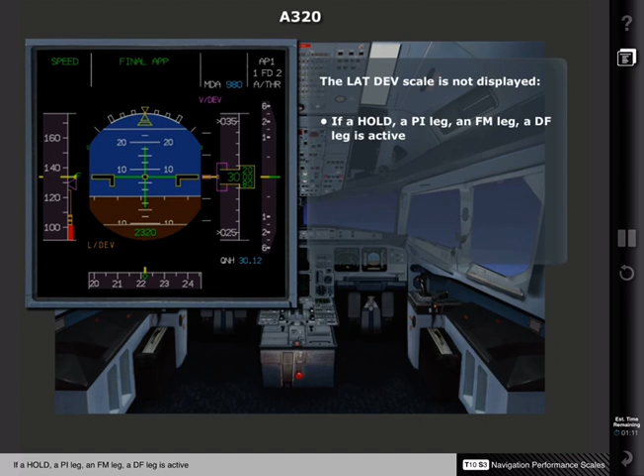If the LS push button is pressed, lateral deviation displays in amber and no deviation is displayed. The LAT deviation scale is not displayed if a hold, a PI leg, an FM leg, or a DF leg is active, when the lateral deviation information provides a misleading indication of the direction to be followed to come onto the active flight plan, or in the done phase.

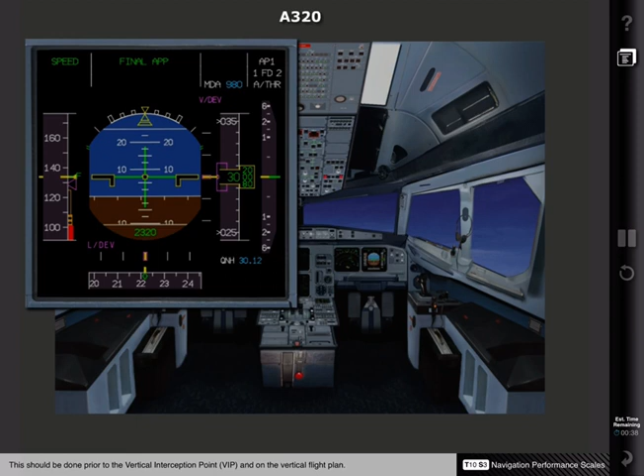When on an RNP approach and the approach push button is pressed on the FCU, the vertical deviation scale is displayed on the PFD. This should be done prior to the vertical interception point, or VIP, and on the vertical flight plan. At the VIP, a blue arrow on the ND indicates that final approach engagement conditions are met.

The ND displays the cross-track with 2 digits after the dot when the aircraft is below the transition altitude and cross-track is greater than or equal to 0.02 and less than or equal to 0.29.

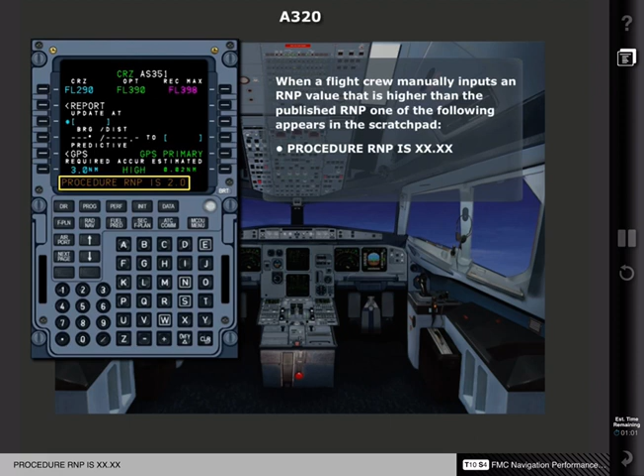The FMC provides various alerts to the flight crew for navigation performance monitoring. When a flight crew manually inputs an RNP value that is higher than the published RNP, one of the following appears in the scratchpad: Procedure RNP is, or Area RNP is. This notifies the crew they should verify the RNP value entered in the required field of the progress page and clear or modify it as necessary.

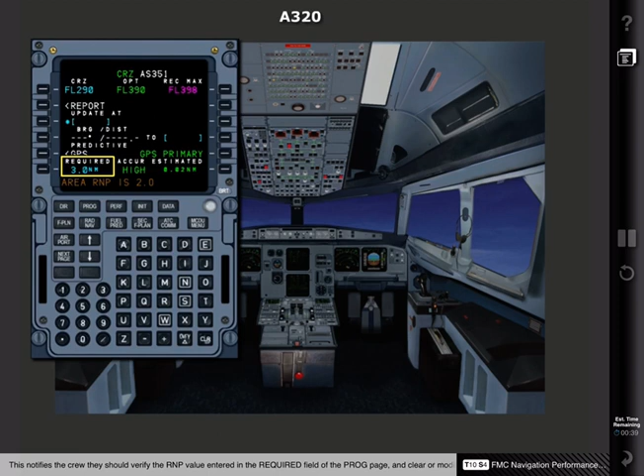Accuracy switching from high to low triggers the amber nav accuracy downgrade on the MCDU and ND. If accuracy becomes low, GPS primary lost displays on both the MCDU and ND. The white nav accuracy upgrade message appears on both when the accuracy becomes high again.

Refer to your company's operating manuals for proper procedures on RNAV and RNP operations.